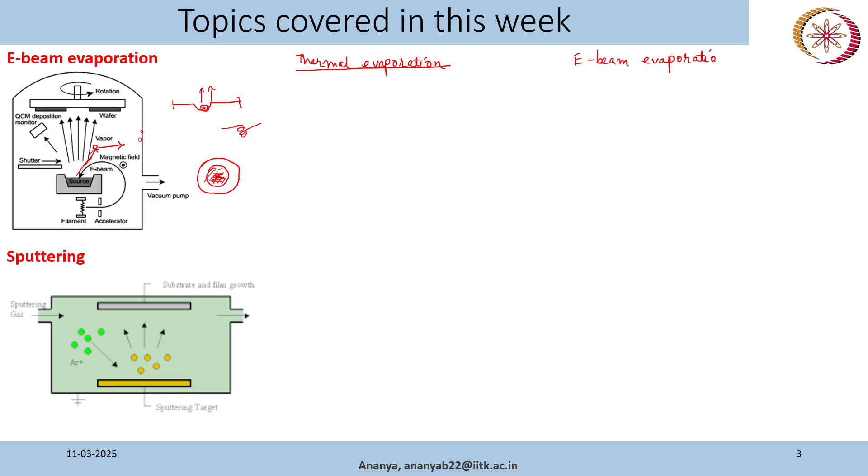First, thermal evaporation and e-beam evaporation. Thermal evaporation uses resistive heating to evaporate the material. E-beam evaporation uses an electron beam, which is of high energy, to heat and evaporate the material. Okay, so this is the basic difference. And the advantage of the thermal evaporator is that it's a very simple system, so the cost is less compared to e-beam evaporation. Okay.

And another advantage is that it can be easily used for different metals. So you know that aluminium has a melting point, if I remember correctly, around 660 degrees Celsius. And the boat we normally use, or the basket we use, is of tungsten or molybdenum, and those have a melting point above 3000 degrees Celsius. I don't remember the exact number. So we can use this thermal evaporation system for a range of metals.

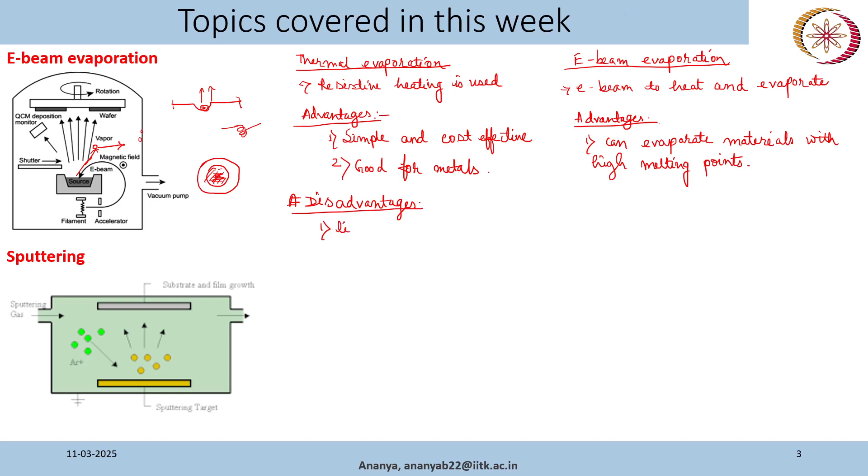and another disadvantage is that in case of the thermal evaporator, we pass the current through this boat or basket, so it actually heats up the boat or basket. So even though the melting point difference is very high for the target material and the boat material, there can be some contamination. Some atoms from the boat will also be present in your evaporated material, and that can also affect your film quality.

Whereas when you want a very good quality film and you don't want any contamination, here you can see the electron beam is very focused, and it is focused only on the target material, not on the crucible. So the contamination will be less for e-beam evaporation compared to thermal evaporation. So if you want a very good quality film, then you can go for e-beam evaporation.

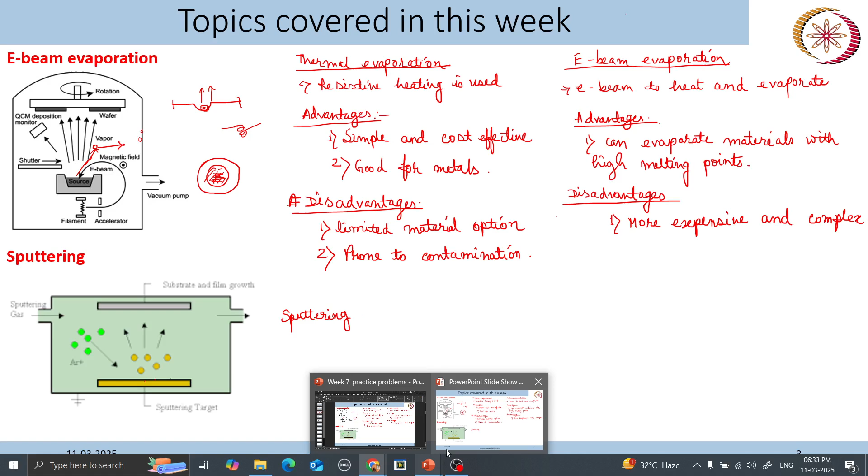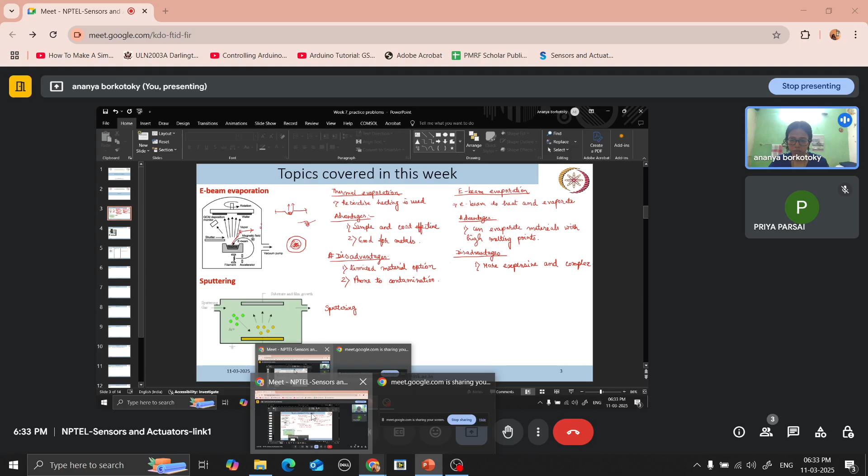Okay, let me remove this. I think it is difficult to see that. My screen is visible, right? Okay. Yes.

Next is sputtering. So sputtering involves ejecting material or atoms from target, which is our source, onto the substrate.

So for sputtering, we normally use argon or any other suitable inert gas. That is because we don't want any contamination in our target or in our film. That is why we use argon, and also the reason is that we want to eject materials or atoms from the target. So we want an inert gas that has an atomic weight close to the target material that we are using.

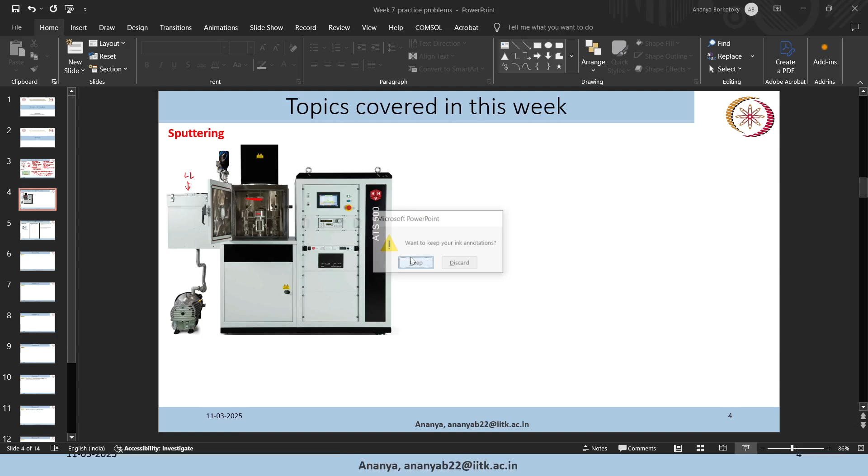I have never seen a configuration where the substrate holder is kept below. So I'm sorry if I cannot answer your question exactly, but these are the reasons I think the configuration is kept like this, at least in the systems that I have seen. I will search if that kind of configuration is there.

See, what you want is your argon atom should hit your target atom, right? So this is argon plus, so you bias it negatively here. Then only your argon atoms will come here and hit. I also don't use the terms anode and cathode that much. Just remember that these are argon plus ions and they should hit our target. That is how we do the biasing. If it is positive, that will not happen, right? The sputtering will not happen. Just remember that.

So this plasma will be argon plus and electrons, a combination of all these things. So basically it's argon plus ions. Okay, I hope it is clear.

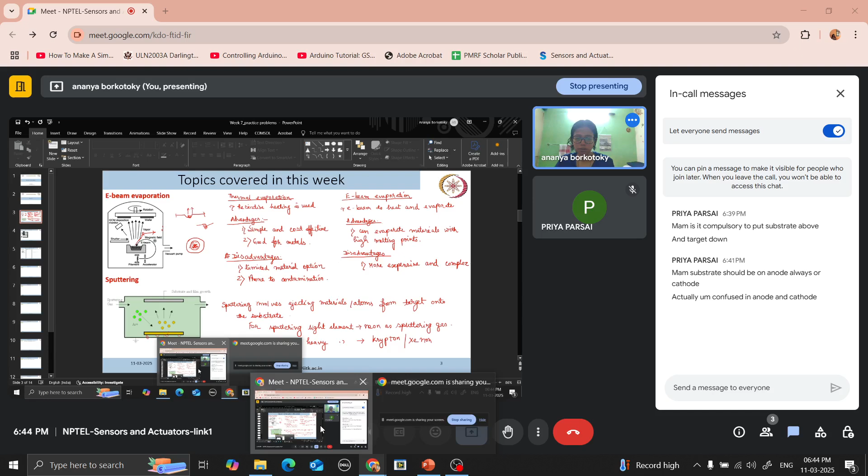Okay, so this is a sputtering system. These are the main components: the load lock, the main chamber, and this is the interface, the control unit, and you will have your pump. This is the rotary pump connected to the load lock, and there will be another pump, because a rotary pump cannot create very high vacuum. Another pump, like a turbo pump, will create high vacuum inside the chamber.

Now there are certain advantages and disadvantages of sputtering. We have discussed different physical vapor deposition techniques: evaporation, which includes thermal evaporation and e-beam evaporation, as well as sputtering. All of these are for deposition of thin films, but the processes are a little bit different, and each process has certain advantages and disadvantages.

Now in case of sputtering, you can see here, we can actually have a large area target, and we can do the deposition on large substrates. As I mentioned, the targets are around 4 inch in diameter. So these are big targets, and you can go for longer deposition time and get a very thick film.

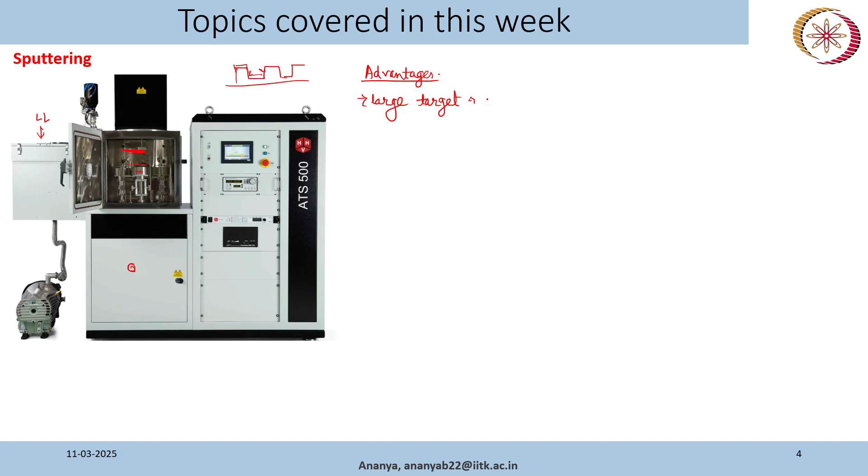So large target, uniform deposition over large area. It can provide good step coverage, I'm comparing with evaporation.

If there is any non-uniformity in your structure, in your wafer or substrate, sputtering will cover those things. Pre-sputtering will help remove any contamination of the target.

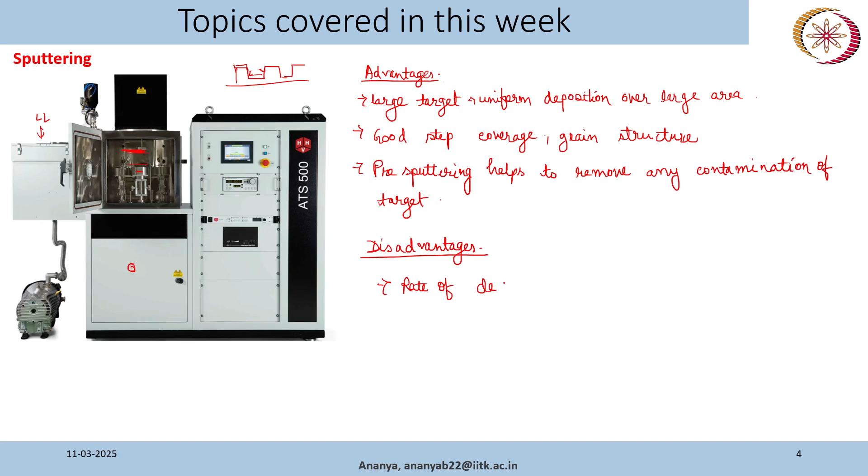And some disadvantages: rate of deposition, for some material, for example SiO2, can be low. Okay. But then there is one advantage of sputtering, that it is not like it happens in one go. So we have a big target. If we can control our plasma, if our plasma is not fluctuating, even if our deposition rate is very slow, then also we can go for longer deposition time and get the desired thickness.

Okay, so yes, SiO2 deposition, it's actually very slow. We have an SiO2 target here, but if we go for deposition for longer duration, this problem can also be overcome. Okay. Now, the deposition we do in case of sputtering is relatively at higher pressure. As soon as we introduce argon gas, the chamber pressure actually increases. So, there is a possibility that there are some impurities, and that will actually contaminate our film. Okay.

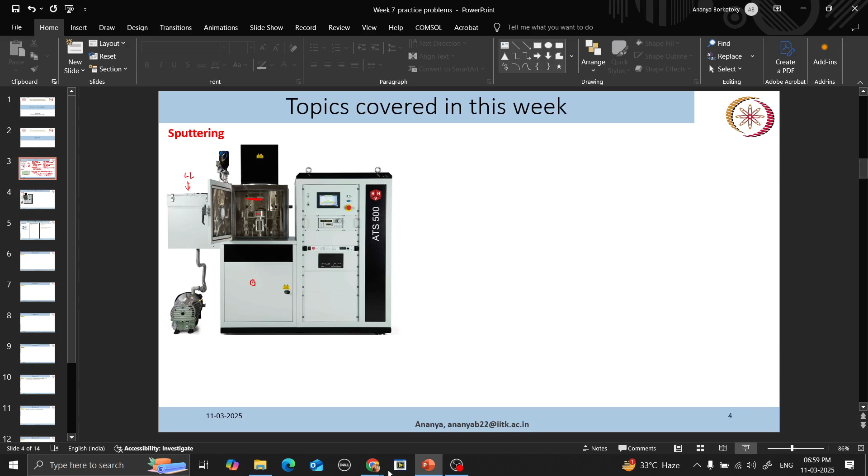I hope there are people in the meeting. And okay,

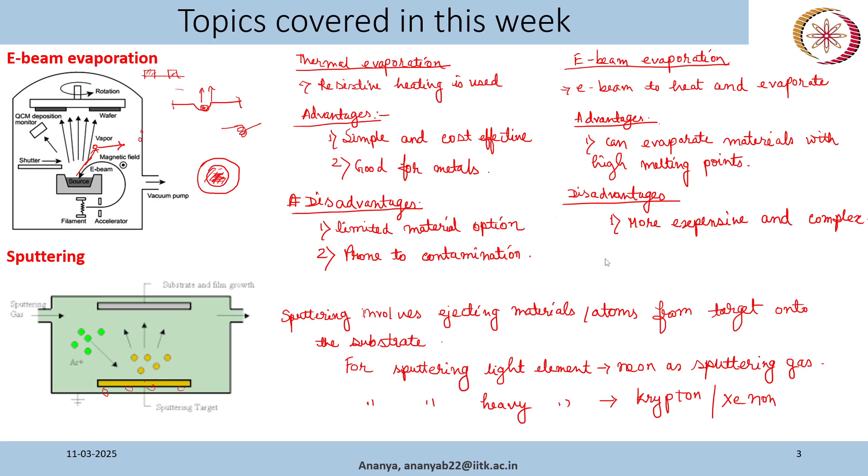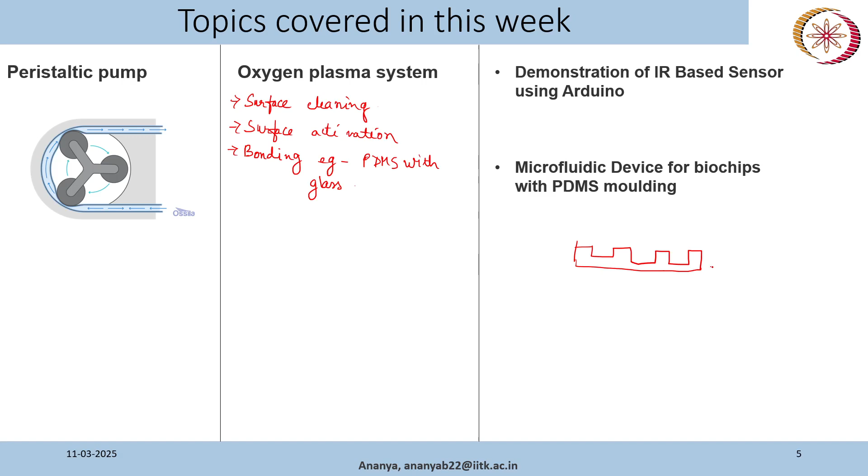Next topic was microfluidic devices for biochips with PDMS molding. So we had learned how we can make micro channels in PDMS. First we have a master that is of silicon. We make the master with standard photolithography processes. We actually have the inverted structure of what we want on the master, and say we have our master like this. This is our master. This can be of silicon. Okay, we make this using standard photolithography.

Then we pour PDMS and we do the curing. Okay, and then we peel off this PDMS layer, and we will get the microchannels. So that will have the opposite nature of the master. Then we bond this PDMS with glass to make our channels. Okay, this we have already discussed, and the lab video shows how it is done. Okay, so let me go to the questions next.

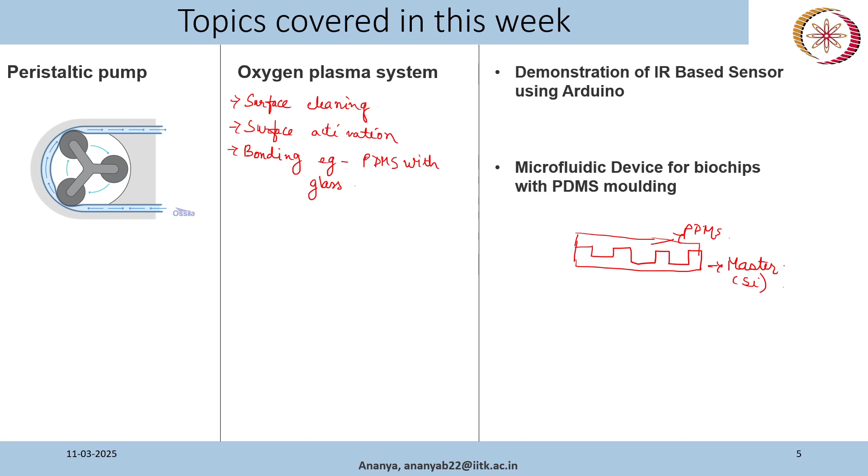Is there any question or doubt, or I will start the questions? Okay, I will start the questions then. Okay, if you have any question, then you can ask. You can unmute also instead of writing. Yeah.

Ma'am, can you repeat that first slide, that e-beam and thermal, once again? Can you explain? Okay, I'll just briefly explain.

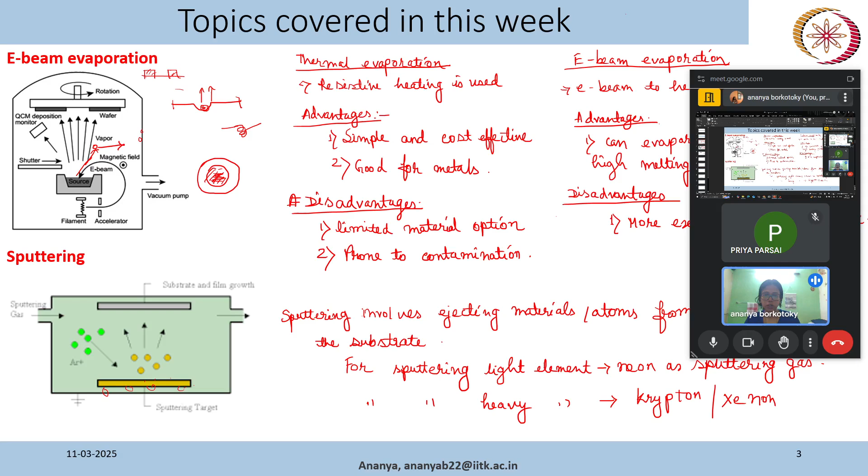So, I have discussed thermal evaporation earlier. So, how is it done? We have a boat like this or a basket. Okay, so this is a boat, usually of tungsten or molybdenum. The basket we normally use in our lab is of tungsten, and the boat sometimes molybdenum. We apply current here, and because of this current there will be Joule heating, because we are applying electric current that will generate heat. So this heat will actually melt the target material.

Say we are keeping aluminium here, and once it melts, it will evaporate and sit on the wafer at the top. Okay, a similar kind of arrangement is there in the case of e-beam evaporation, but the difference is that instead of this heating arrangement, we have a filament to which we apply high voltage, and this filament will emit electrons because of thermionic emission. You can see what thermionic emission is. Now electrons will be ejected. These will be of high energy.

The electrons will be of high energy that can create heat. Now we want to direct this electron beam to our source. This is our target material. Say we are keeping nickel here. Now how will we deflect our electron beam to our target or source?

So we will use a magnetic field. You know that electrons will be affected by electromagnetic fields. So these are kind of like lenses. We have lenses to guide optical light, right? You know what a lens does. These are kind of lenses that actually guide the electron beam, but these are actually magnetic fields. So these are electromagnetic lenses to guide the electron beam, and the electron beam will hit the source.

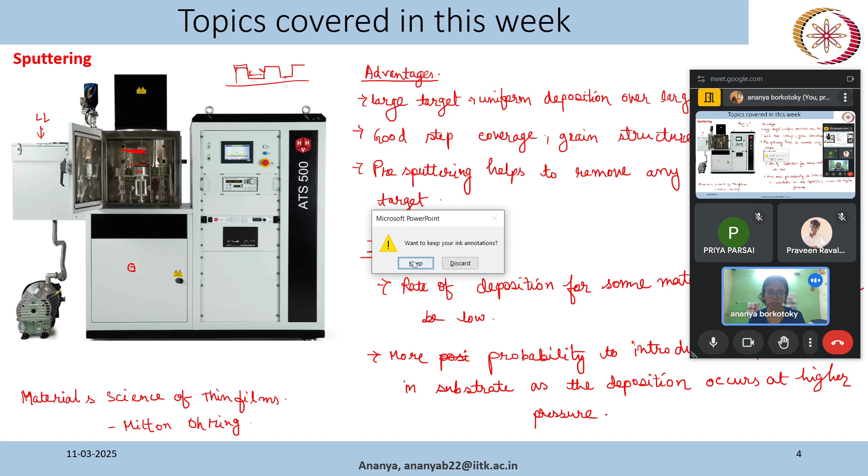So I will write down the first question. What is a key advantage of sputtering over evaporation? Evaporation can be thermal or e-beam evaporation; both techniques are similar. Option A is higher deposition rate. Option B is better step coverage and adhesion. Option C is lower cost.

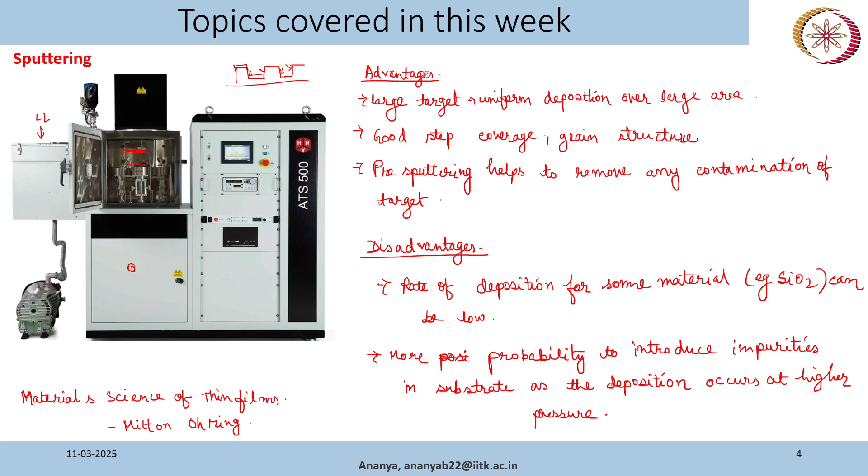Okay, when we want a good step coverage, if we have a very conformal kind of structure, we'll get a good deposition using sputtering. Also, high energy atoms will hit our substrate, because these are ejected material due to sputtering. So the adhesion between the film and the substrate will be better compared to evaporation. So this is the main advantage.

Now higher deposition rate: deposition rate for certain materials for sputtering is actually less compared to evaporation. And lower cost, that is also not true. A thermal evaporation system is a fairly simple system. We just need some resistive heating element. Now again the overall cost will depend on how sophisticated the instrument is, and depending on the vendor, the manufacturer.

But in general, sputtering will need some kind of RF energy source system. There will be magnetrons, so that actually includes more cost compared to a simple thermal evaporation system. Works with metal? No, sputtering works with a variety of materials. It can be used for insulators like silicon dioxide as well, and we can make alloys and compounds using sputtering.

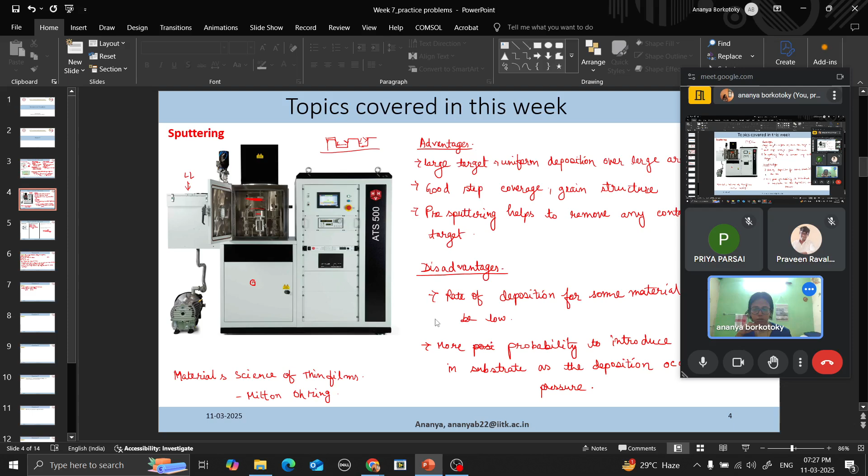I'm waiting for a minute or so that you can answer. I think this is true. We don't hit our substrate with the electron beam, but there is a possibility that it can damage the substrate as well. Okay. We hit our target with the electron beam, not our substrate. You can see here, but still there can be some substrate damage as well. So the answer is true.

The cause is heat generation, because we normally use e-beam evaporation for materials that have very high melting points, right? So the electron beam actually generates a lot of thermal radiation. Okay, we are melting material that has a melting point of, say, 1400, 1500 degrees Celsius, and that much heat is required for evaporation.

In case of sputtering, it is different. We just hit the material and atoms will exit. There will be some heating effect, but not that much. But in thermal evaporation or e-beam evaporation, that is the main process of how we are doing the deposition. So there will be some thermal radiation towards the substrate as well, and that can damage some sensitive substrates.

By sensitive substrate, it can be a flexible substrate, some kind of polymeric substrate. Those substrates cannot sustain very high temperature; that is one trade-off. If you want a very flexible substrate, that will not sustain very high temperature, because those are mainly polymers.

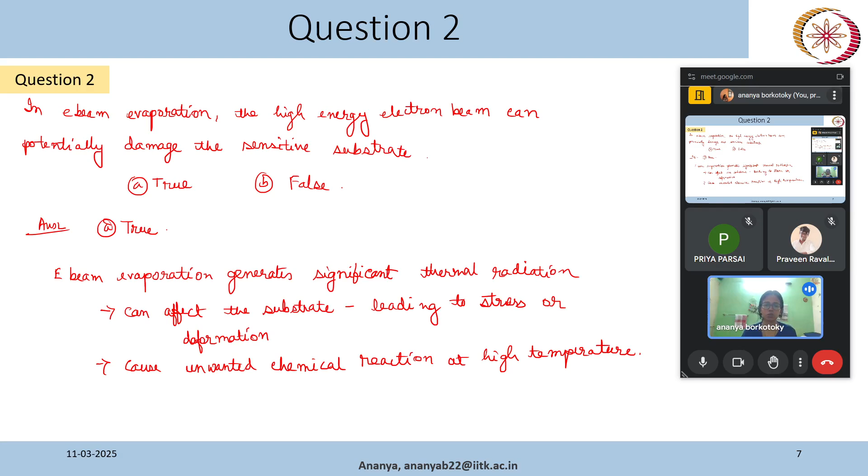Can affect the substrate. Stress or deformation. Next, can cause unwanted chemical reaction at high temperature. So some kind of substrate cooling can be used along with this kind of system so that the effect is less. Okay, let's go to the next question.

So this I explained in sputtering. In magnetron sputtering, the presence of magnetic field helps in what? So the answer options are: A, it increases deposition rate; option B, reduces the ion bombardment;

It depends on the piezoelectric resonance frequency change. Yes, because due to deposition the mass will change and the mass will affect the resonance frequency. So I have explained earlier, in a quartz crystal microbalance, there will be a crystal that vibrates at a certain resonance frequency when an AC voltage is applied. This is due to piezoelectric effect. It has a certain resonance frequency.

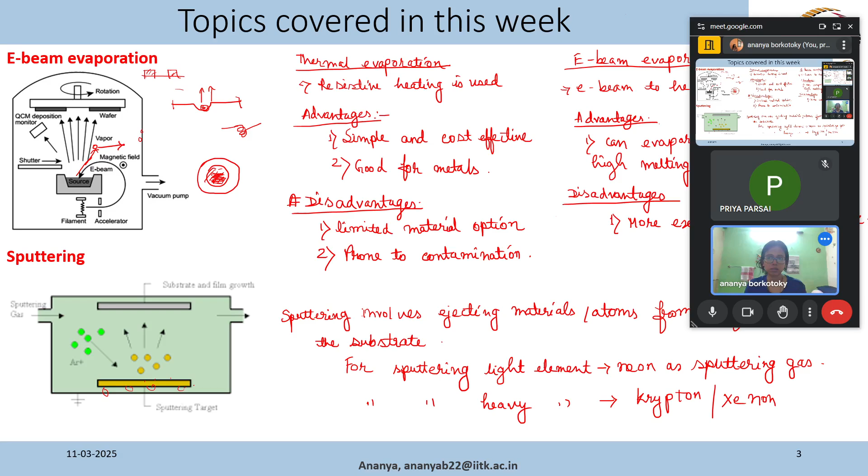Now, the weight will change on the crystal, because with deposition, some atoms will get deposited on the quartz crystal monitor as well. Some atoms will deposit on the monitor and the crystal, the mass will change, and based on that the resonance frequency will change. So there is some calculation: how much the resonance frequency changes will tell the thickness of the film. It gives the deposition rate, and also the final film thickness. So this is connected to a display unit that will give you all this information.

So the answer is, I will write down: the QCM consists of a quartz crystal with electrodes. When AC voltage is applied, the crystal vibrates at its resonance frequency, and this is due to the piezoelectric effect.

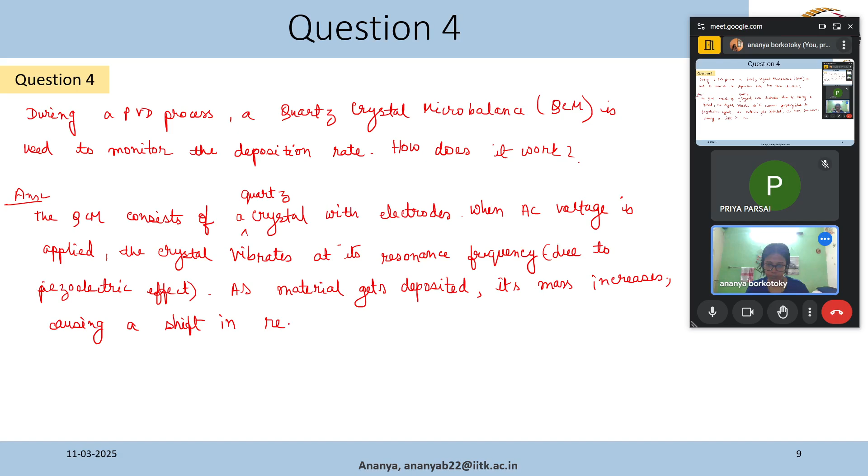As material gets deposited, its mass increases, causing a shift in resonance frequency. The change can be correlated to the thickness of the film deposited.

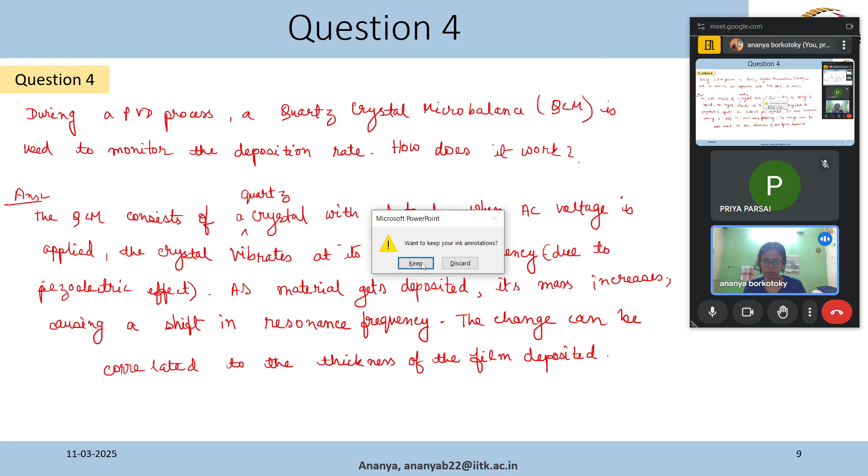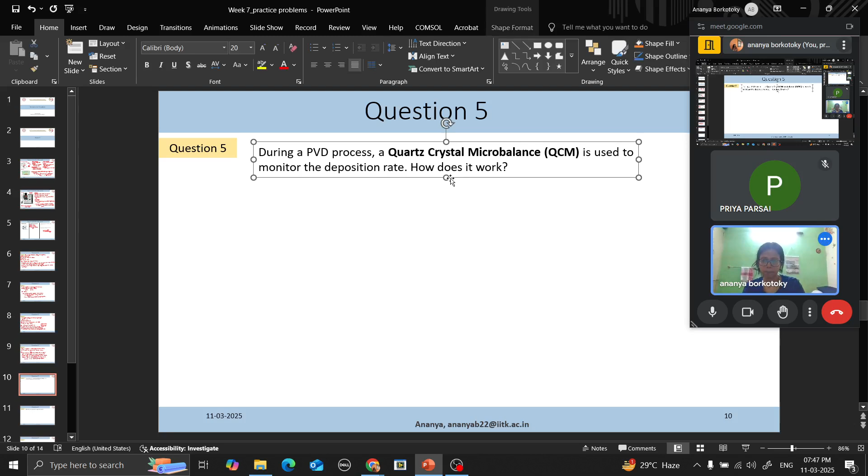So I have given you the explanation just for your reference, and let's go to the next question. Okay, I've already discussed this. Let's just keep it. This is question 6. What are the key components of an oxygen plasma system? You have watched the lab video, so you can tell me the answer. What are the key components of an oxygen plasma system?

Ma'am, vacuum chamber. Hmm. Then one supply was there, gas supply, I think. Oxygen cylinder, yes, because we will create oxygen plasma, so we need an oxygen cylinder and connection to the system. Yes, and they were controlling something with the knobs. Some RF controlling system was there. RF power, because to create plasma we need some power and we use RF energy for that.